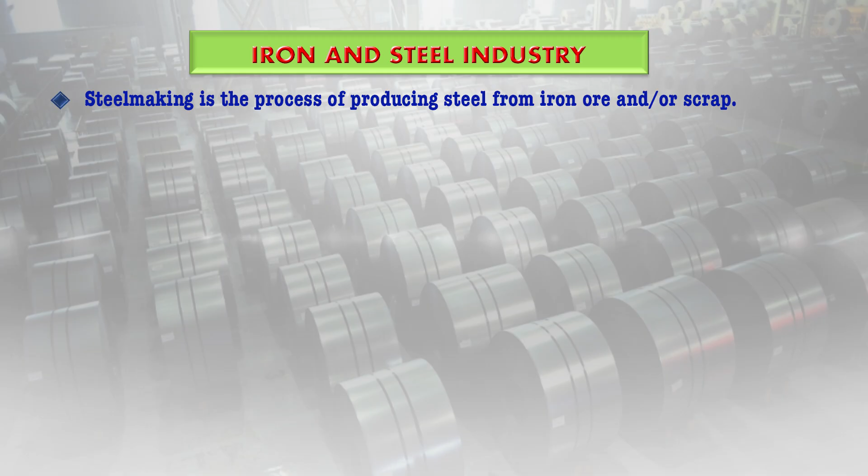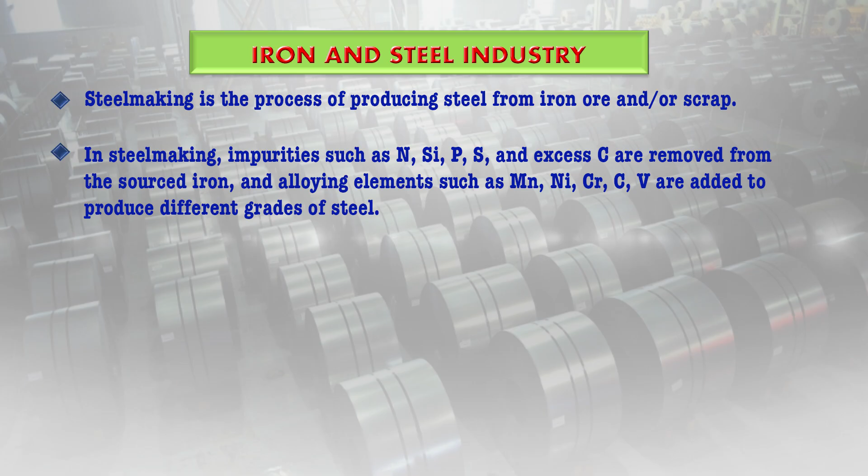Steel making, therefore, is a process of producing steel from iron ore and/or scrap. In steel making, several impurities such as nitrogen, silicon, phosphorus, sulfur and excess carbon are removed from the sourced iron, and then alloying elements are added such as manganese, nickel, chromium, carbon and vanadium. All these are added in order to produce the various grades of steel.

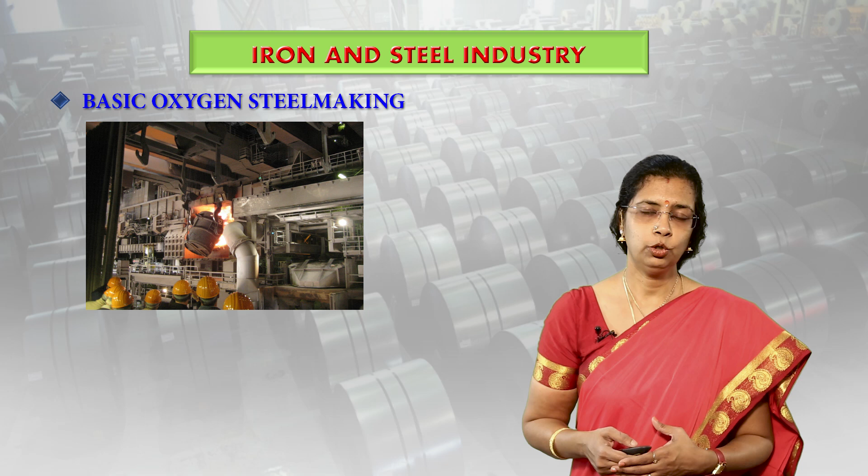Steel making has existed for millennia, but it was not commercialized on a massive scale until the late 14th century. Today, there are two major commercial processes for making steel. One is basic oxygen steel making, where liquid pig iron from the blast furnace and scrap steel are used as the main feed material. Then you have another process known as electric arc furnace steel making. This uses scrap steel or direct reduced iron as the main feed materials.

Steel making is one of the most carbon emission intensive industries in the world. In the year 2020, steel making was estimated to be responsible for 7 to 9% of all direct fossil fuel greenhouse gas emissions. So this is contributing a certain percentage.

In order to mitigate global warming, the industry will need to find reductions in the emissions. In 2020, there have been scientific reports, especially by McKinsey. It identified a number of technologies for decarbonization, including hydrogen usage, carbon capture and reuse, and maximizing the use of electric arc furnaces powered by clean energy.

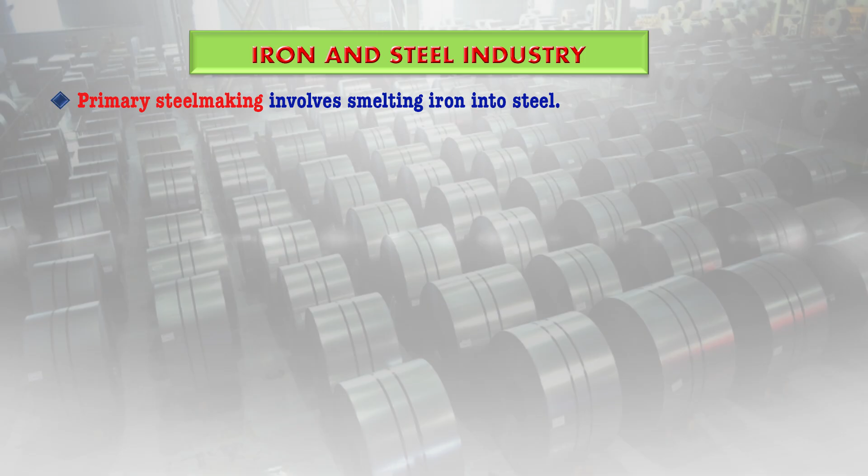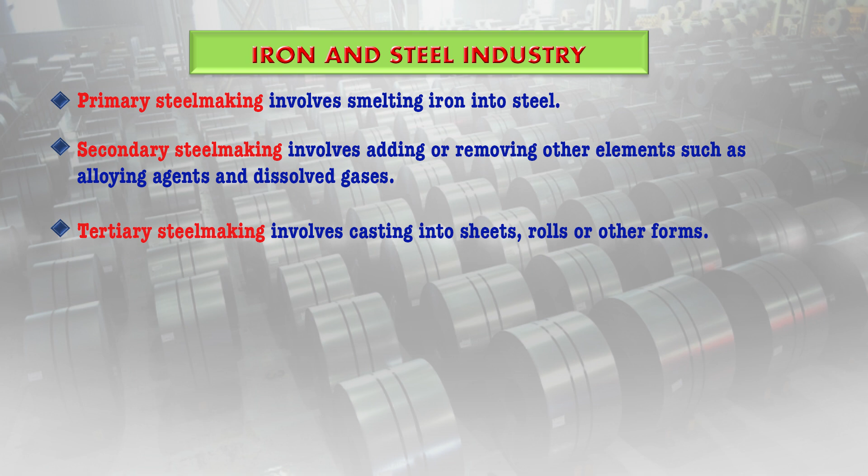Now, these days we are using modern steel making processes. This can be divided into 3 steps, that is the primary, secondary and tertiary steel making. Now, let us first see the primary steel making. This involves smelting of the iron into steel. The secondary process involves adding or removing other elements such as alloying agents and dissolved gases. The tertiary steel making involves the casting into sheets or rolls or any other form of the steel which is desired. Therefore, multiple techniques are available for each step.

The development of the steel industry has brought with it several environmental degradation and environmental pollution problems. With the rapid and intensive industrialization and urbanization in several parts of India, which we are focusing on, this has resulted in high levels of pollution.

Now, the processes involved in steel making. The first step involves mining of the iron ore. So, that is a crucial step. This is a very polluting process and it uses coal for blasting, etc. This itself will release a lot of pollutants like the oxides of sulfur, a lot of particulate matter and fugitive dust.

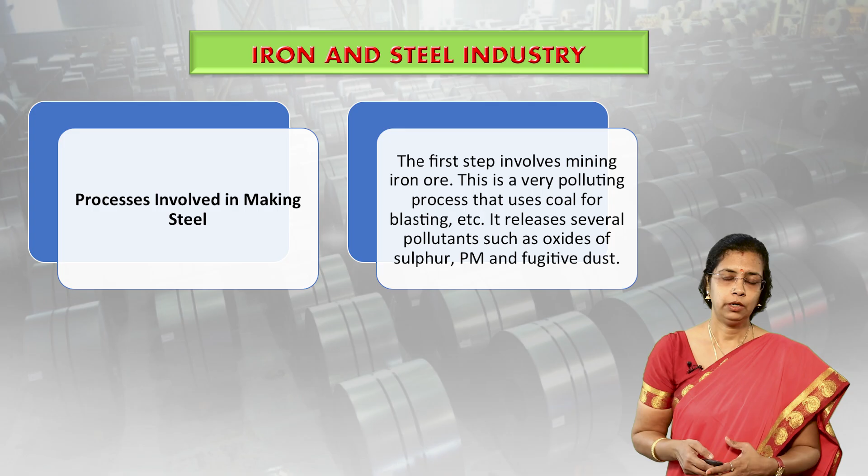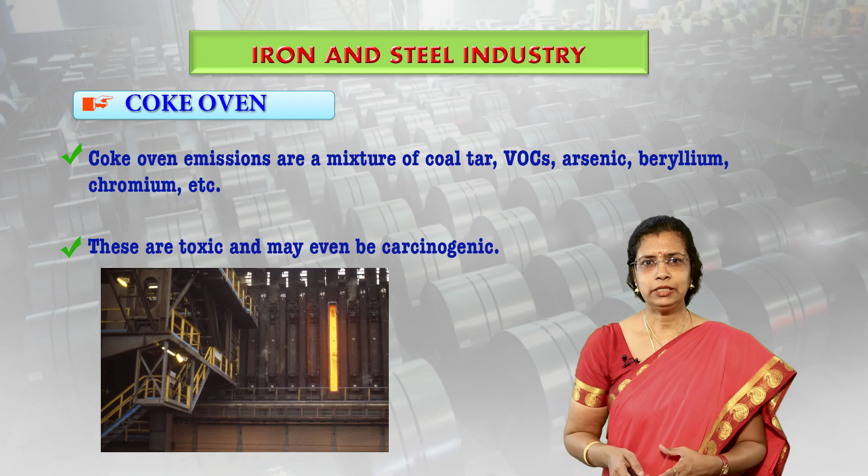Coke oven. The coke oven emissions are a mixture of coal tar, volatile organic compounds and arsenic, beryllium and chromium, which are all heavy metals. These are all toxic and may even be carcinogenic, and we have discussed in some of the lectures and sessions of this PG diploma course where we have dealt with the heavy metals and their toxic effects on human health.

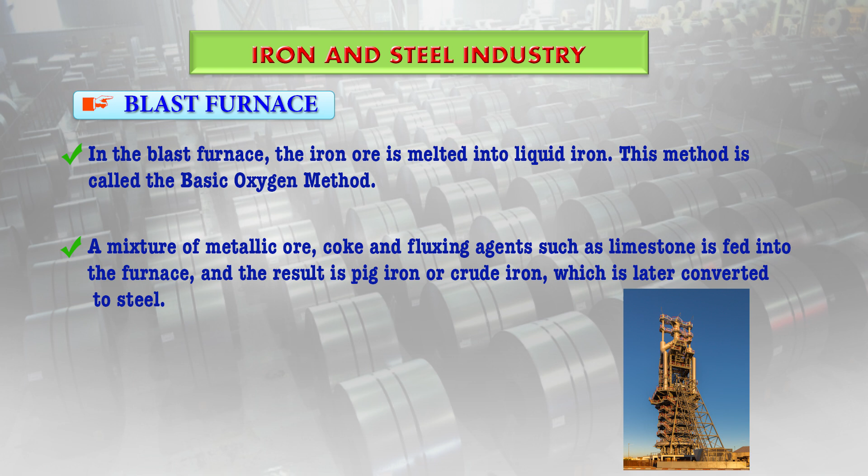An alternate step which we discussed earlier was the electric arc furnace method. This uses high temperature, and that is why we term it as electric, and it uses the high temperature to melt the scrap steel instead of the pig iron. Both the processes will release pollutants such as hydrocarbons, carbon monoxide, particulate matter, nitrogen oxides and also the sulfur oxides.

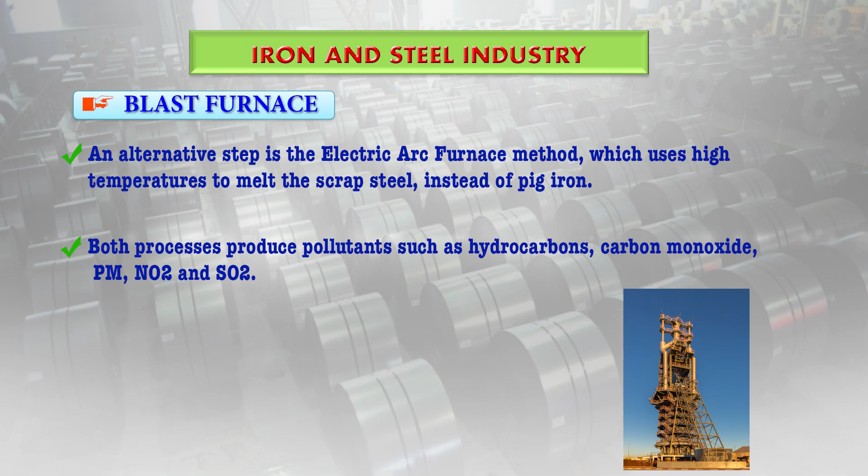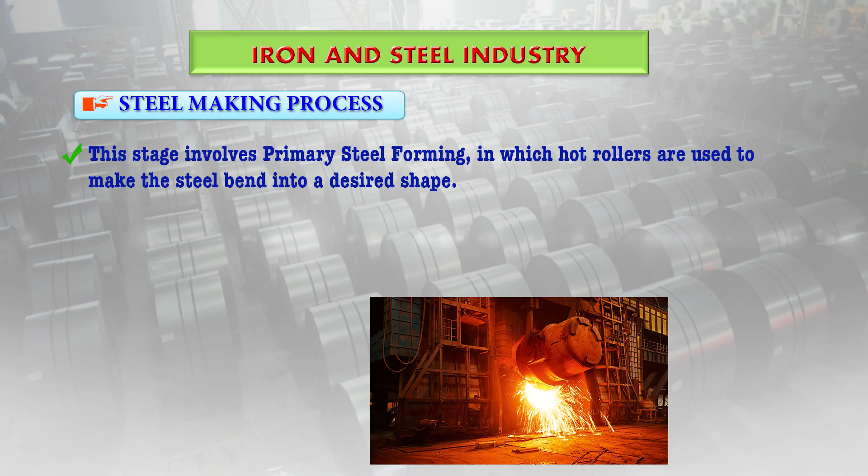So, in the steel making process, we have seen the primary, secondary and tertiary processes, and the hot rollers are used to make the steel bend into a desired shape, and the process will also involve shaping, drilling, welding, coating with zinc, then tempering with heat and surface treatments. All these will release particulate matter and oxides of carbon, nitrogen and sulfur, and all these can cause several environmental and human health problems.

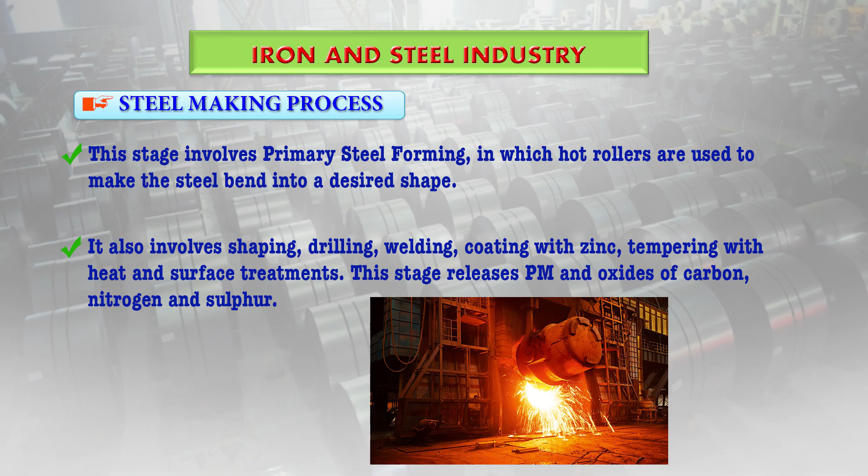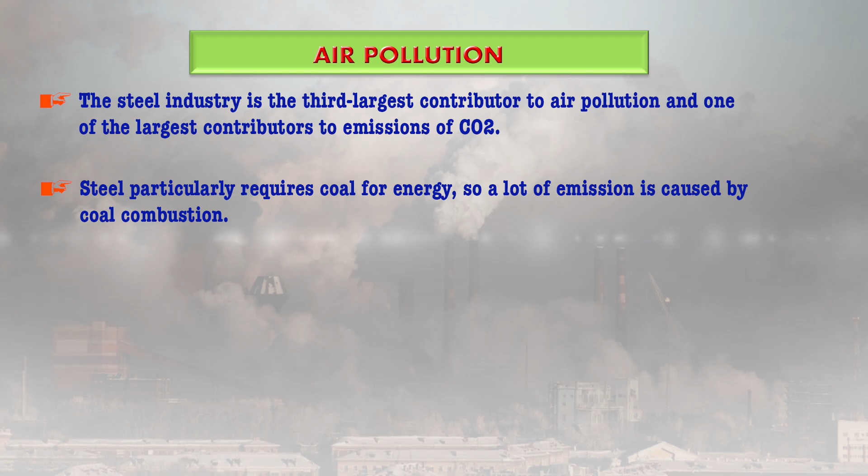Air pollution. So, this is a main problem, and the steel industry is the third largest contributor to air pollution, and it is one of the largest contributors to the emission of carbon dioxide. Steel particularly requires coal for energy. So, a lot of emission is caused by the coal combustion, and the steel plants emit air pollutants such as particulate matter, specifically PM2.5 and PM10 depending on the size of the matter, carbon dioxide, sulfur oxides, nitrogen oxides and carbon monoxide.

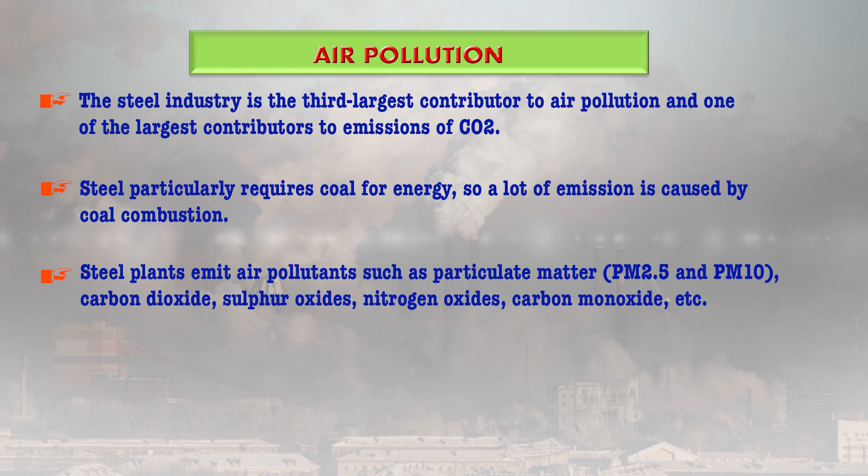So, therefore, there is an urgent need for pollution control which has to be taken up by such industries, and not having effective pollution control systems in place can cause serious damage to an industry's brand image and reputation, apart from compromising the health of its workers and the communities. And also, when you violate these guidelines, it can also result in the shutdown of the steel plant.

Fugitive emissions. So, what do we mean by fugitive? One of the major challenges faced by the steel industry is unaccounted or fugitive emissions. Fugitive emissions refer to pollutants that can escape from a source without being accounted for. Regular emissions from known sources are accounted for and can be easily tracked and also controlled, because when we know the point source of any pollutant, then we can track it and we can also take certain management practices in order to control the same.

When you don't know the source and it is an unintended release, such emissions are called fugitive emissions. Since we don't know how they are being emitted, they are difficult to track because their source is unknown. Hence, they contribute to ambient air pollution in an untraceable way. This occurs during every stage of the steel manufacturing process, and this is one of the major challenges which this industry has.

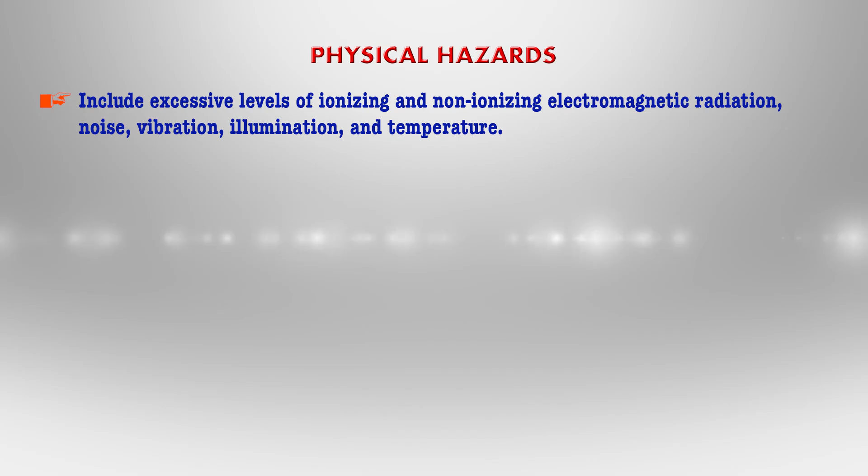Now let us come specifically to physical hazards. These include excessive levels of ionizing and non-ionizing electromagnetic radiation, noise, vibration, illumination, and temperature. In occupations with exposure to ionizing radiation, time, distance, and shielding from these hazards are very important to ensure employee safety.

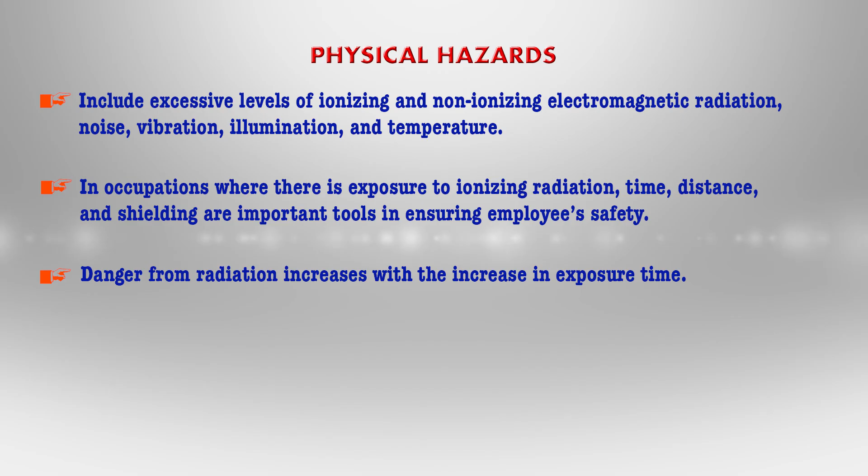Danger from such radiation increases with increased exposure time. Distance is a valuable tool in controlling exposure to both ionizing and non-ionizing radiation. Therefore we need to shield ourselves, which is protection against radiation, and the greater the protective mass between a radioactive source and the employee, the lower the radiation exposure.

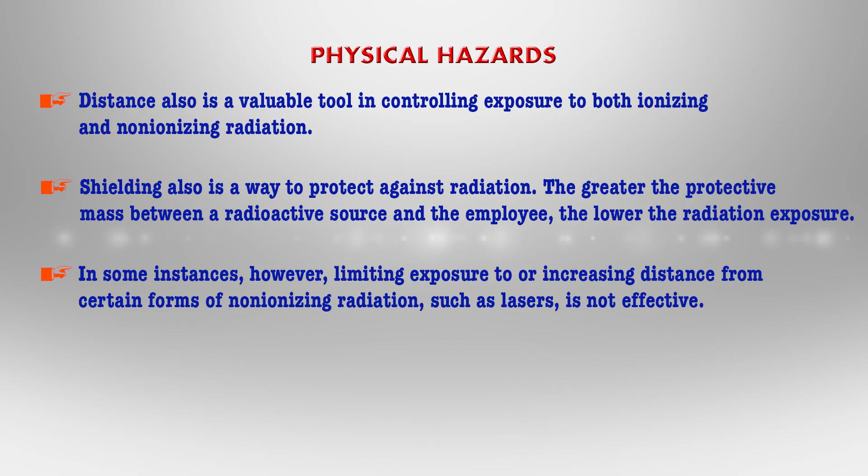In some instances, limiting exposure to or increasing distance from certain forms of non-ionizing radiation, such as lasers, may not be very effective. For example, exposure to laser radiation faster than the blinking of an eye can be hazardous, and that would require employees to be miles away from the laser source before being adequately protected. So shielding workers from this source could be an effective control method.

Noise is again another physical hazard, and it could be controlled by various measures. Noise can be reduced by installing equipment and systems that have been engineered, designed, and built to operate quietly. They can also enclose such noisy machinery in certain enclosures and shielding these equipments.

You can also ensure these equipments are in good condition, repaired periodically, and properly maintained. We can also treat the floors, ceilings, and walls with certain acoustical material, which will reduce the reflected or reverberant noise. Erecting sound barriers at adjacent workstations around noisy operations can also reduce employees' exposure to noise generated at adjacent workstations.

Another physical hazard is radiant heat exposure, which is very common in the steel plant. Radiant heat exposure can be controlled by installing reflective shields and by providing protective clothing.

Chemical hazards involve harmful chemical compounds, which could be in the form of solids, liquids, gases, mist, dust, fumes, and vapors. They all exert toxic effects by inhalation, by ingestion, by absorption, the various routes of exposure through which the human is exposed.

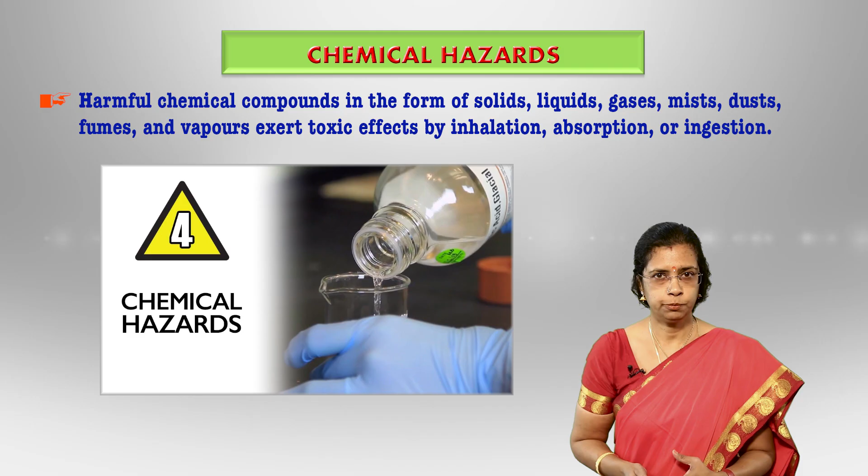Biological hazards are mainly bacteria, viruses, fungi, and other living organisms that can cause certain acute and chronic infections when they enter the body directly or through breaks in the skin, and can also be transmitted from person to person.

Therefore, with biological hazards, this will only involve effective personal hygiene and paying proper attention to minor cuts or scratches, and also the type of food given to the employee. These biological risks can be kept to a minimum if workers practice proper personal hygiene, particularly hand washing, which is very important for biological hazards.

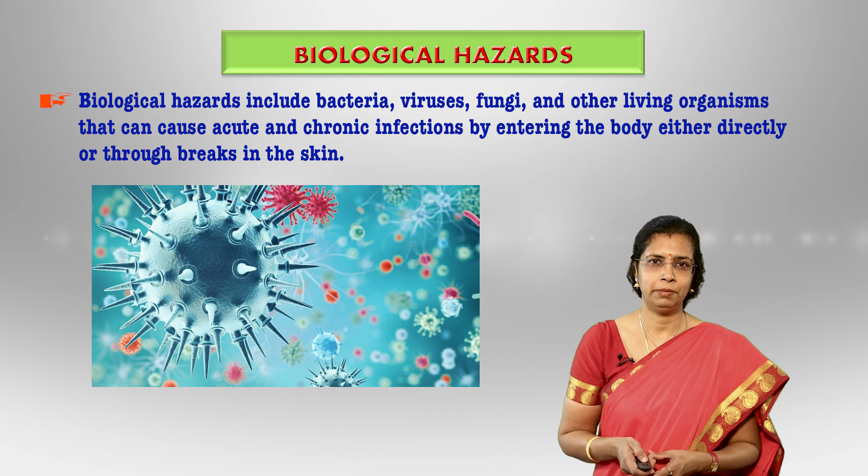Ergonomic hazards involve excessive vibration, noise, eye strain, repetitive motion, heavy lifting, and improperly designed tools or work areas. This can lead to ergonomic hazard.

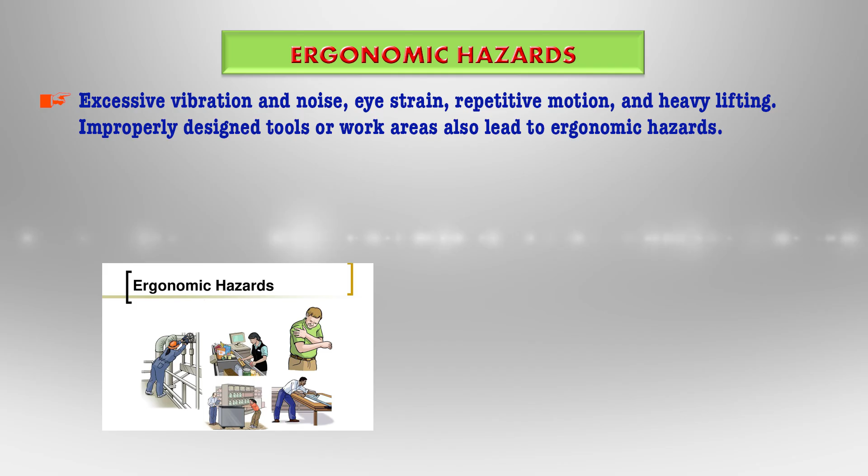Repeatedly doing the same kind of work or lifting heavy items, like sorting, assembling, or even data entry, can cause inflammation of the wrist and hands, leading to carpal tunnel syndrome. You can also get back pain, sprains and strains, or stiff joints and necks, etc.

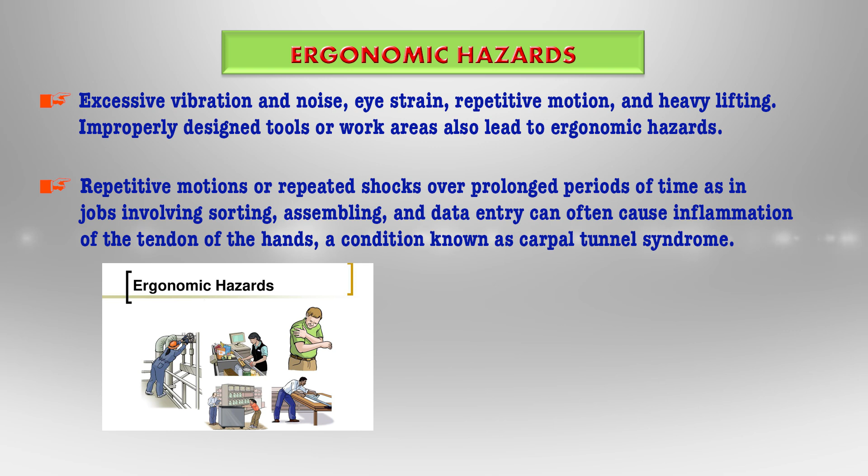Now let us go on to the types of solid waste generation. In the iron and steel industry, we have ferruginous and non-ferruginous waste.

Ferruginous waste is generated from steel making, like flue dust and sludge from the blast furnace. Non-ferruginous waste involves lime, broken refractory bricks, broken fire clay bricks, acetylene plant sludge, and so on.

Blast furnace flue dust and electric arc furnace dust are a mixture of oxides and coke fines. They also contain silicon, calcium, magnesium, and some undesirable elements like zinc, lead, and alkali metals.

Rolling mill sludge is also contaminated with oil and inorganic particles. Dry slag exhibits high strength and high temperature endurance, and is therefore quite suitable for making concrete aggregate.

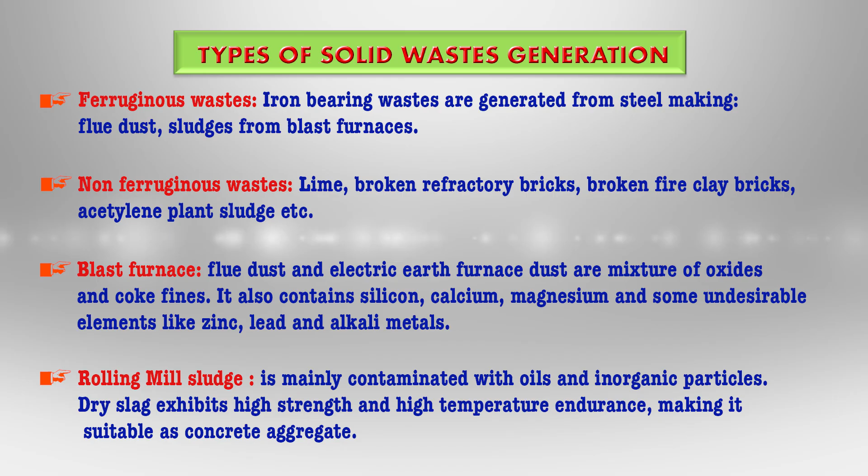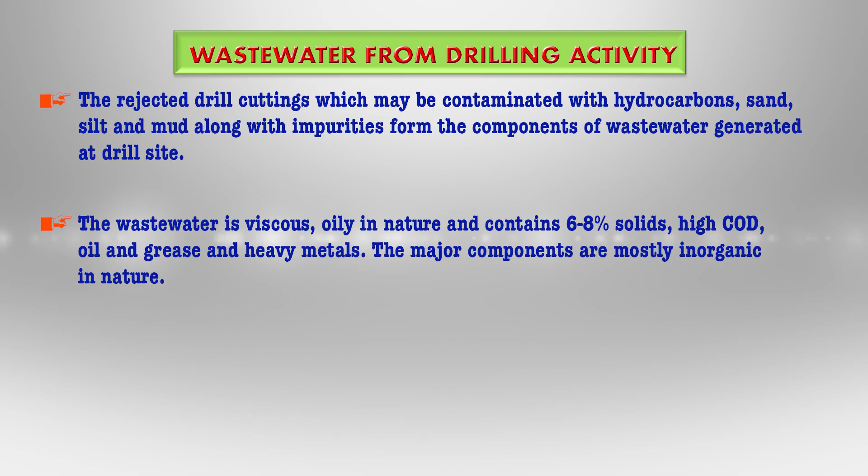Wastewater from drilling activity, even from drill cuttings and rejected drill cuttings, can be contaminated with hydrocarbons, sand, silt and mud, along with impurities and components of the wastewater generated at the drill site. This wastewater is viscous and oily in nature, and can contain 6 to 8% of solids, high chemical oxygen demand, oil, grease, and heavy metals.

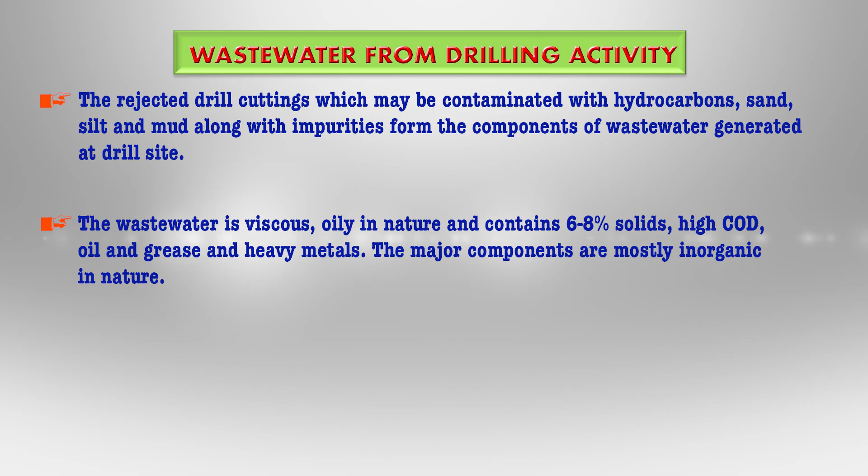The major components are mostly inorganic in nature. The same applies to wastewater from the processing facility. This water that is recovered during emulsion breaking is called produced water, and it is often recycled to remove excess free oil.

It can then be filtered and stored in water tanks prior to underground injection to enhance recovery. This produced water can contain dissolved solids, chloride, emulsified oil, chemical oxygen demand, biological oxygen demand, and heavy metals. However, irrespective of pre-treatment, these wastes are characterized by high mineral content, salinity, oil, grease, and hydrocarbons.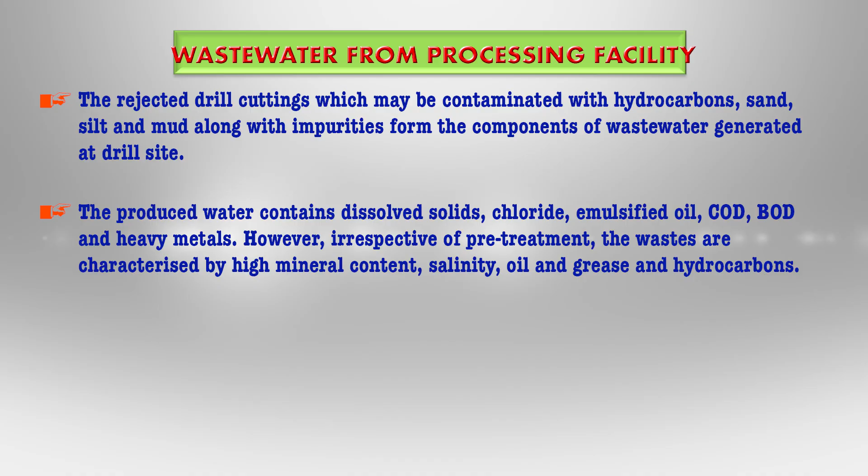Wastewater from the refinery process usually contains hydrogen sulfide, ammonia, and oil.

Effects on health and the environment: we have already seen how air pollutants can cause problems, and historically this has been an environmental concern in the context of localized public health impacts that the industry can have on densely populated areas.

Emissions from this industry can vary depending on the process employed, the type of process used, engineering and construction of the plant, raw material and energy inputs, and effectiveness of the pollution control equipment. Generally this generates a lot of volatile organic compounds and hazardous air pollutants through their processing.

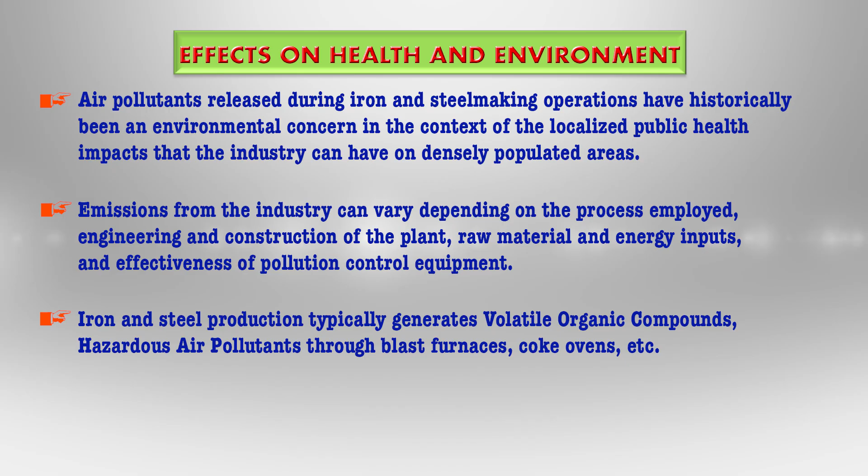Polycyclic aromatic hydrocarbon is another pollutant, and due to its persistence, bioaccumulation, and toxicity in the surroundings, it is a cause of concern, and it also exhibits mutagenic and/or carcinogenic properties.

From the electric arc furnace, polychlorinated dibenzo-p-dioxins and dibenzofurans can emit as sources of air pollutants. In particular, the production will release several sulfur oxides, nitrogen dioxide, lead, and also a lot of soot and dust.

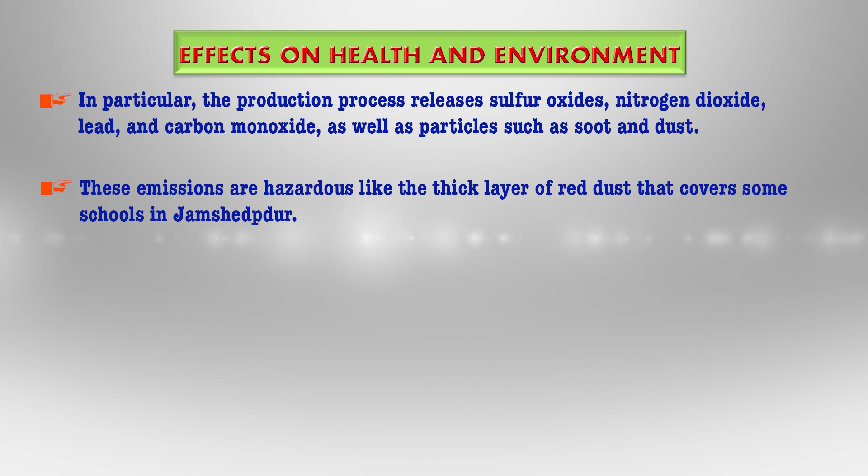Now regarding these emissions, one of the case studies we could take up is one of the iron and steel industries located in Jamshedpur.

Now the schools which are bordering these areas, their playgrounds and the schools themselves are actually covered by a thick layer of red dust, because iron itself is red in color. So it has the red dust and it is covering these schools.

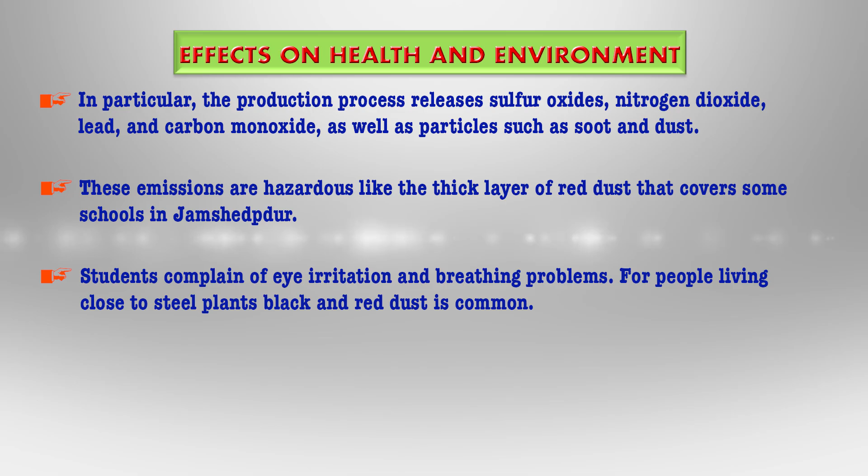The students and the faculty, the employees who are working in the school, they are complaining of eye irritation, a lot of breathing problems, and asthmatics have again problems. So for those people who are also living close to these steel plants, the black and the red dust is very common, and that is causing a lot of health concerns.

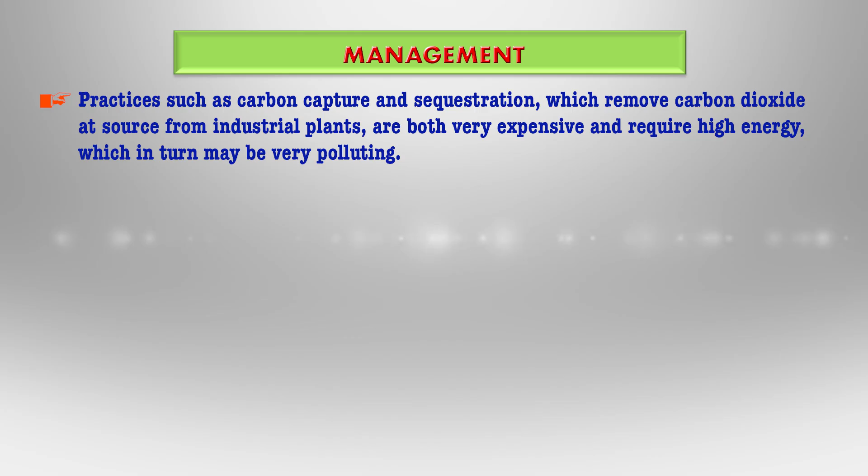Management: some management practices such as carbon capture and sequestration, referred to as CCS, can remove the carbon dioxide at source from industrial plants. These are very expensive and require high energy, and they can also be polluting. Studies show that carbon capture and sequestration can lead to a 25% increase in emissions from burning coal.

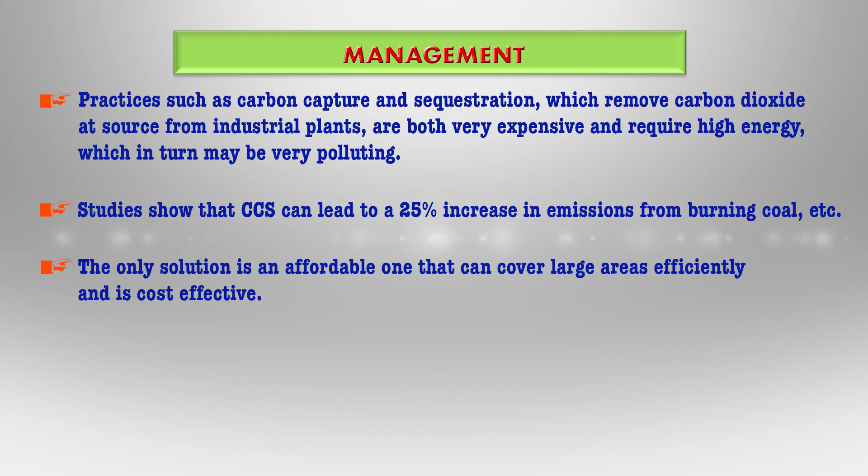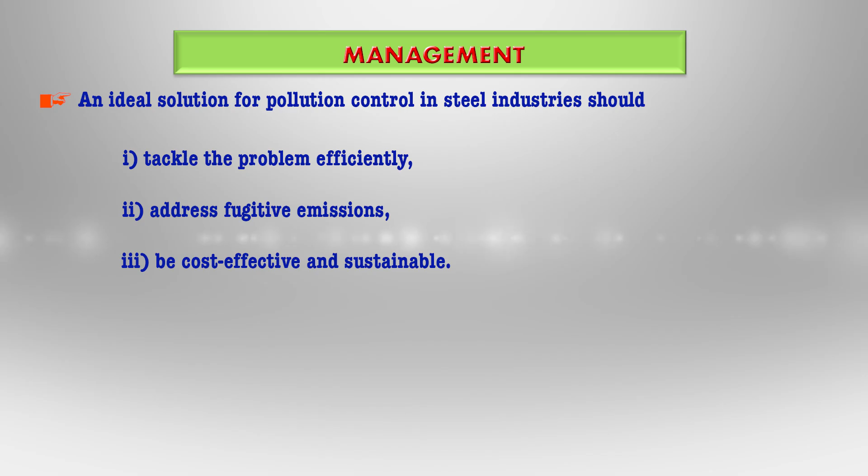So therefore, the only solution is an affordable one that can cover large areas efficiently and which is also cost effective. An ideal solution for pollution control in the steel industries should be able to tackle the problem efficiently, address the fugitive emissions, and be cost effective and sustainable.

Some notable green practices followed by some steel industries have been instrumental. Now, sustainable light steel frame construction is a type of construction with steel which involves pre-engineered parts. They are easy to set up and dismantle as well. These steel frame constructions require less extensive foundation and involve lesser time. They also considerably reduce the emissions at construction sites.

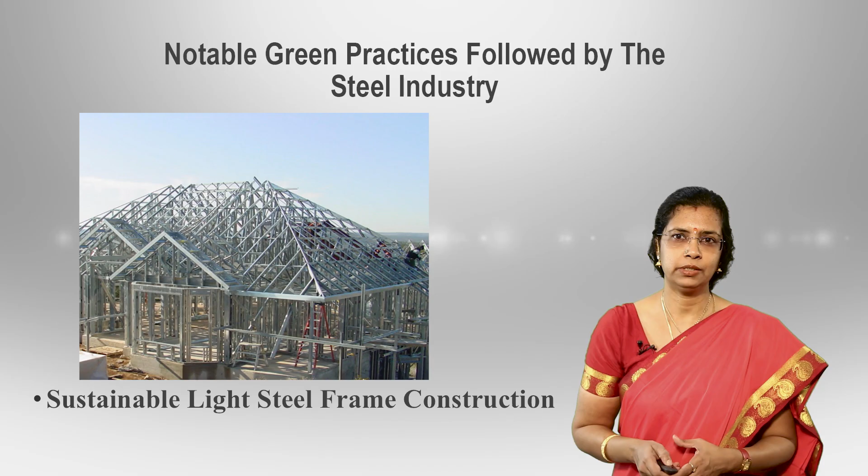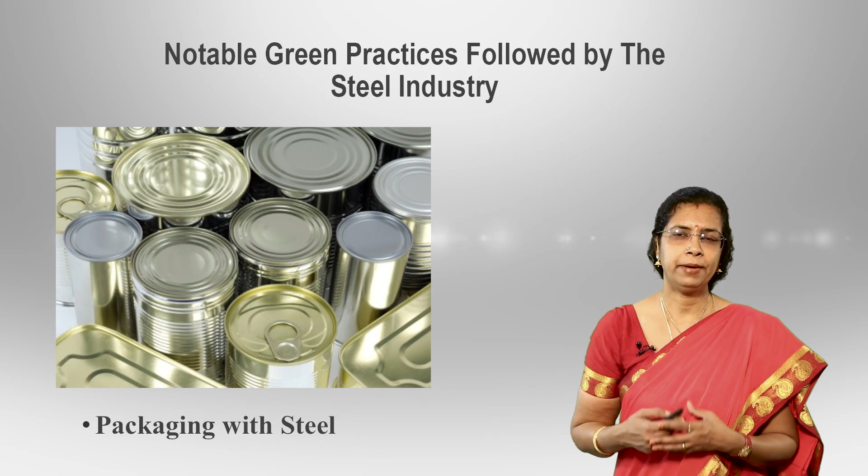Then, packaging with steel. Steel contributes extensively to the circular economy since it can be endlessly recycled and remade without any loss to quality. Therefore, companies have started taking advantage of this benefit by reusing and recycling these steel bottles and jars, and you can pack consumer goods such as shampoos or conditioners and even food items.

Using slag to sustain the marine environment - this was one case study. Steel companies such as POSCO in South Korea have been using steel containers made of slag, a byproduct of steel, to fight the desertification of the marine algae forest on the South Korean coast. They have been doing this since 2007. Slag is a dense, rock-like material, and algae is planted in these slag containers; their density and weight protect the algae forest from typhoons and also from tsunamis.

Management of waste used by several other industries - one example I would like to cite is that of Jindal Steel and Power. Through their extensive research and development activities, they have identified several things, and the company is also seriously working on the 3 R's - recycle, reduce and reuse - in order to manage its waste.

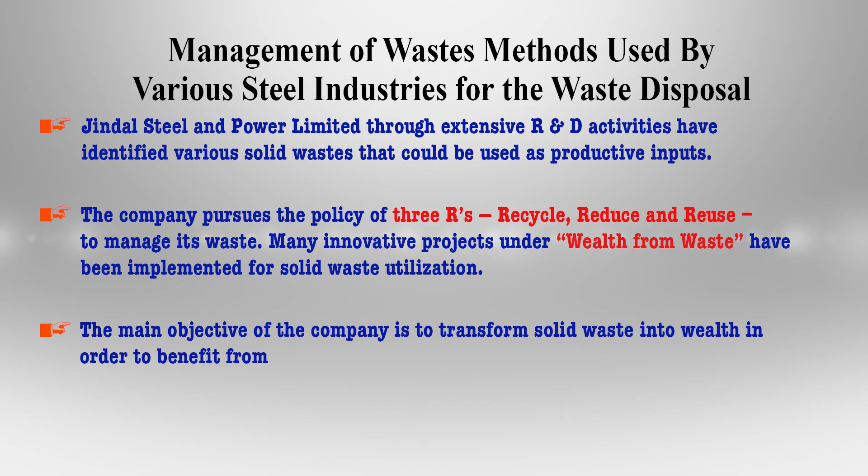They have several innovative projects under the 'wealth from waste' initiative. These have been implemented for solid waste utilization, and the main objective of the company is to transform solid waste into wealth in order to benefit from this.

Biomethanation plants have been installed in Chhattisgarh in association with the BARC in Mumbai for biogas production. Similarly, biodegradable waste from residential areas is collected, segregated, and then fed into those machines. The resulting ash is partly used for brick making, for ash dike rising, for roads and embankment construction, for cement manufacturing, and also for land filling.

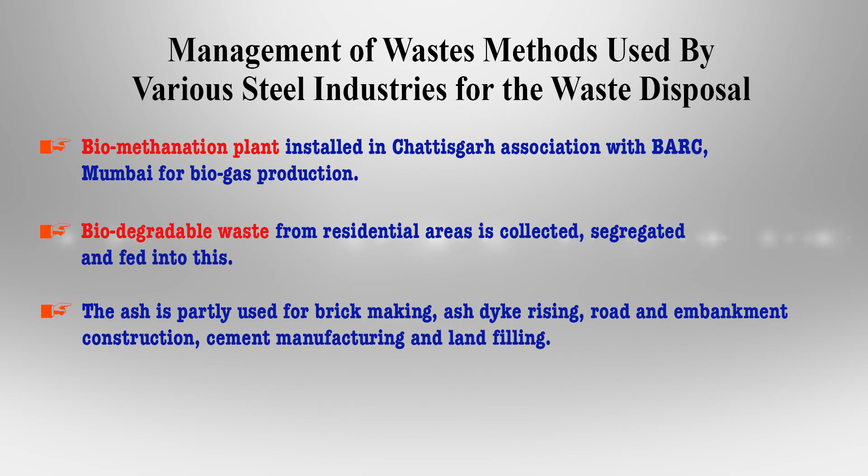So these are some of the innovative and green practices and management practices which have been done by some of the notable companies and industries.

Therefore, my dear learners, in this session we have understood about the processes involved in the iron and steel industry, the different types of pollutants generated from these industries, the various environmental and occupational hazards that come out and how people are getting affected from these industries, and finally the management practices and green and sustainable practices that some companies have come up with.